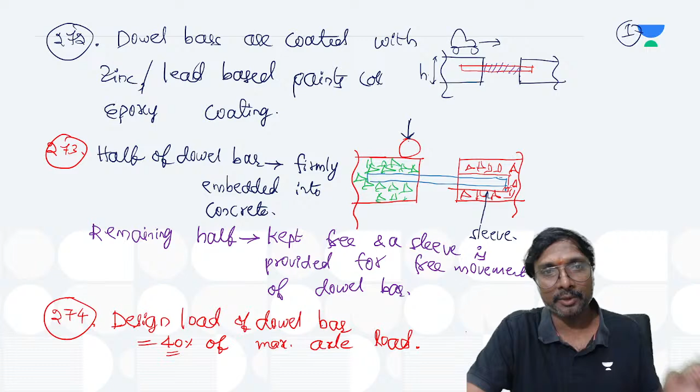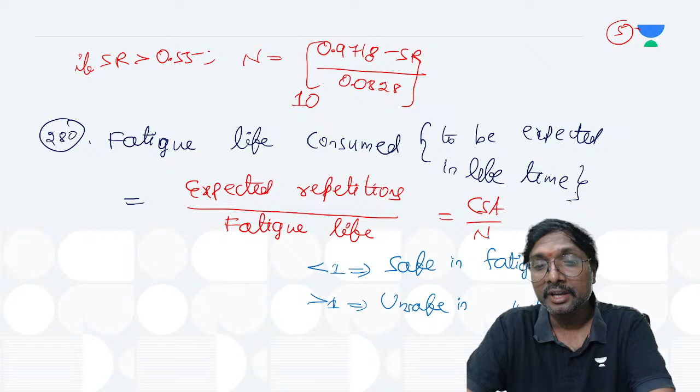So dowel bars and all these things we have seen, mud pumping and fatigue life, right? These are all the things we have done up to fatigue life. So how many points got over? That 280 number of points we have covered, these are completed, you can say.

And if we just observe, all these things we have discussed regarding the rigid pavement. So I will go in a quick manner so that you will have an idea of what we have discussed: standard axle loads, radius of relative stiffness, CSA, and equivalent radius of resisting section, types of stresses.

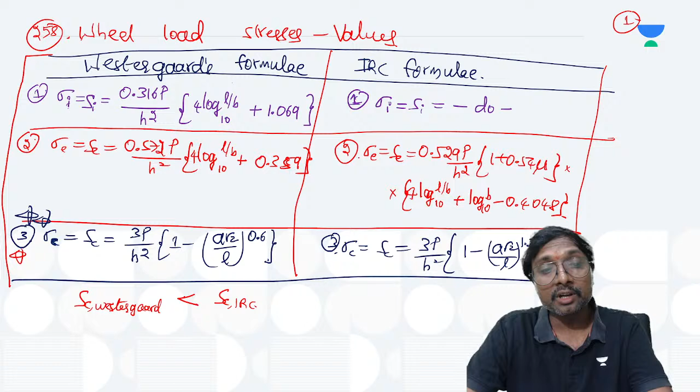Which types of stresses will be having: wheel load stresses, warping stresses and frictional stresses. Nature of wheel load stresses, and amount of wheel load stresses is also done. After that, warping stresses in nature and amount of warping stresses, frictional stresses in nature and amount of frictional stresses, all these are done, yes or no?

Now after that, what happens is the stress combination. Only one type of stress will be acting, or all the types of stresses will be acting on a pavement? All these types of stresses will be acting on a pavement. So this is stress combination, which combinations of stresses we are having.

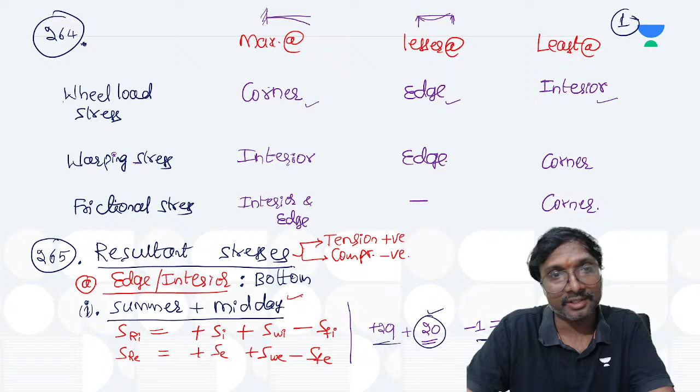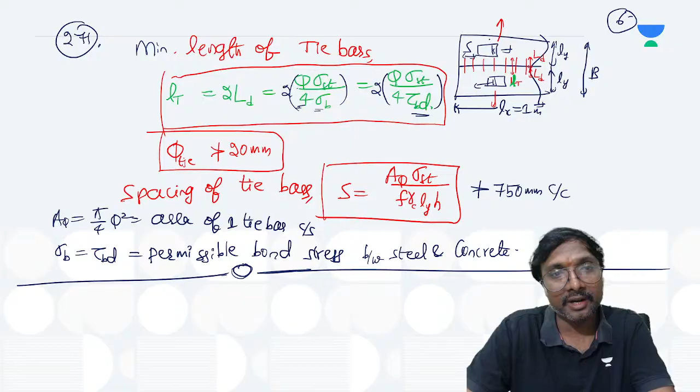Next, what about joints? Expansion joints, and after that contraction joints, their spacing specifications, longitudinal joints, dowel bar, tie bar, and all these things. And after that various other points regarding dowel bar design and design load of the dowel bar, bearing stress or bearing forces.

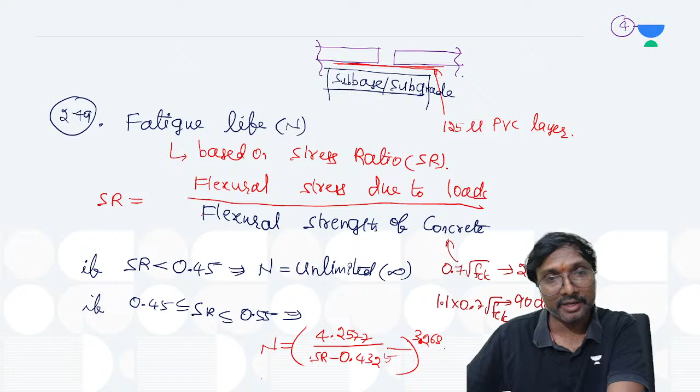And all these things we have discussed, right? So this mud pumping we have discussed, to take care of mud pumping, that 125 micron PVC sheet we have to go for. And fatigue also we have done, so fatigue life, fatigue life consumed - based on this fatigue life consumed, we have to decide whether it is safe or not.

So this is the quick revision for highway, and traffic engineering we'll be going for next. But before we go to traffic engineering, let's see if anything else is left. That is your 280, and you take this as 281, and there is one formula, the Goldbeck formula. Have you heard this formula anytime?

Goldbeck formula for which one? Tell me, thickness of CC pavement, na? It is mainly for thickness of this CC pavement, yes, thickness of CC pavement.

So what is that formula? CC pavement slab. H will be equal to under root of 3W divided by sigma maximum. So what is that sigma maximum? That sigma maximum is your permissible stress. And what is W, if you just observe, W will be your wheel load.

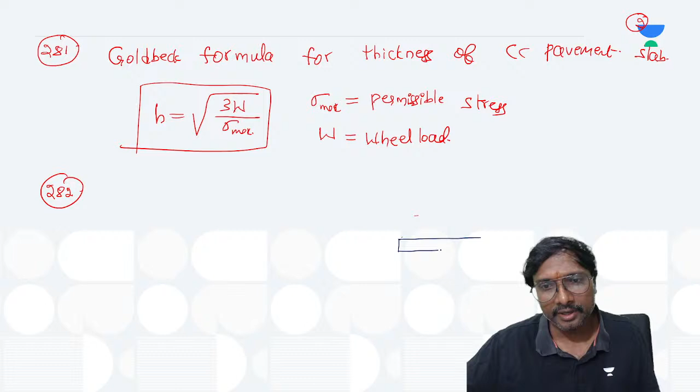First of all, if you just observe, this is your slab if you are considering. So mainly to take care of shrinkage, if that reinforcement is provided, then it is called shrinkage reinforcement. So that is your slab, you can say, if you just observe.

That is your slab, right. Now what is that? These are the reinforcement bars we are providing at the center. So these bars, how do they look like? They will be like this. If you just observe these bars, and if you consider these bars...

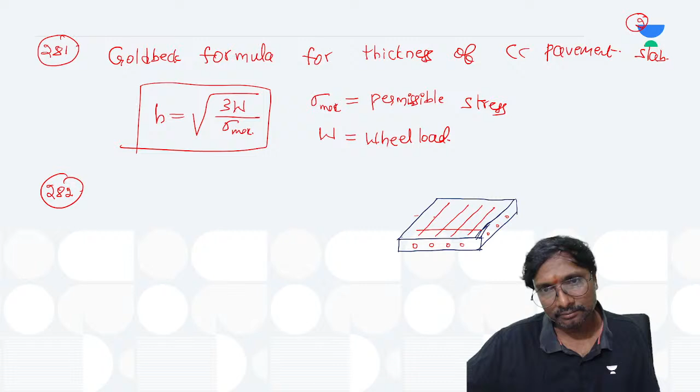So this is your shrinkage reinforcement, right? What is that mainly, that shrinkage reinforcement, tell me? It is to take care of which one? This is shrinkage only, no? So the name itself is telling that shrinkage reinforcement will be provided to take care of this shrinkage only.

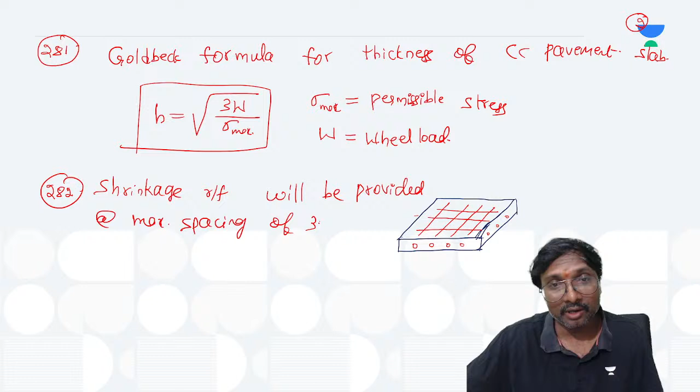Shrinkage reinforcement will be provided at which location, at a maximum spacing? How much maximum spacing do we have to maintain? At a maximum spacing of 300 millimeter center to center, between the reinforcement bars.

So with how much minimum cover do we have to maintain? With a minimum cover of 50 millimeter, right? 50 millimeter from where? From bottom. And the reinforcement will be nearer to top surface, or nearer to bottom surface, if you just observe? It is nearer to this top surface, you can say.

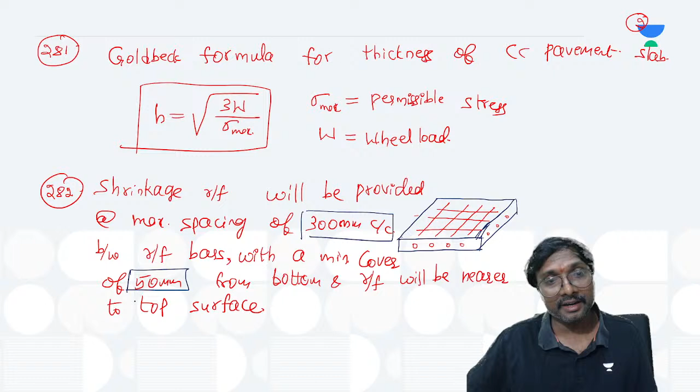Why will it be taken nearer to the top surface? Why can it not be taken nearer to the bottom surface, if you just observe? So this cover is 50 millimeter and nearer to this top surface. This is important, right? Nearer to top surface - what is the reason? Anyone having an idea? What is the reason for this to be provided nearer to the top surface?

Because if you consider, whenever it is top down cracking - what is top down cracking, you can say? Originally it is subjected to, during night time, expansion like this. So whenever the self weight is resisting, what happens? The crack will start here and propagate from top to bottom. Yes or no? This is top down cracking, right?

Next, what is another one you are having? Bottom up cracking, if you just observe. So whenever it is bottom up cracking, the cracking will start at the bottom and it will go in the upward direction.

Now tell me, which crack is dangerous? Top to bottom cracking is dangerous, or bottom to top cracking is dangerous? Tell me. If the crack is at the bottom, water will not go into it, so there is no problem. But if it is a top crack, there is a possibility that water will enter and everything will enter onto this - it is dangerous, right? So it is better we prevent this top down cracking.

So it is better you provide - how can you prevent this cracking? When you are providing the reinforcement nearer to the top surface or nearer to the bottom surface? When you provide this reinforcement nearer to the top surface only, it is possible. Understood now? Why it is nearer to the top surface? Clear, everyone, all of you? Why should the reinforcement be provided near the top surface? Is it clear or not? Is it not? Hello? Somebody?

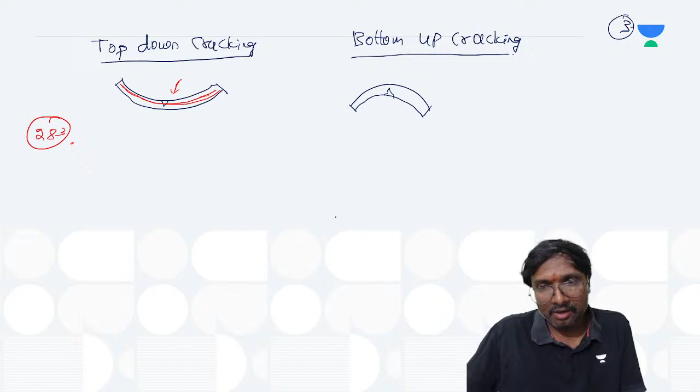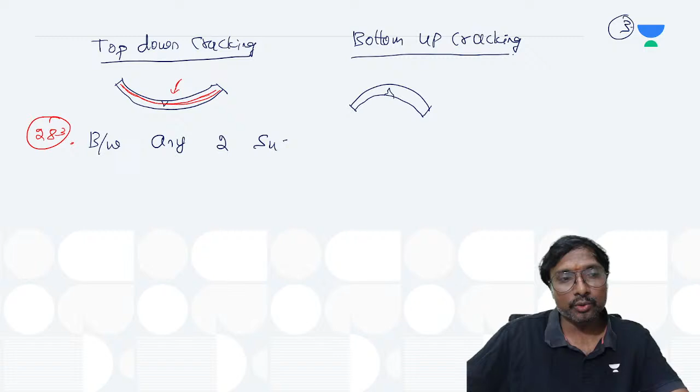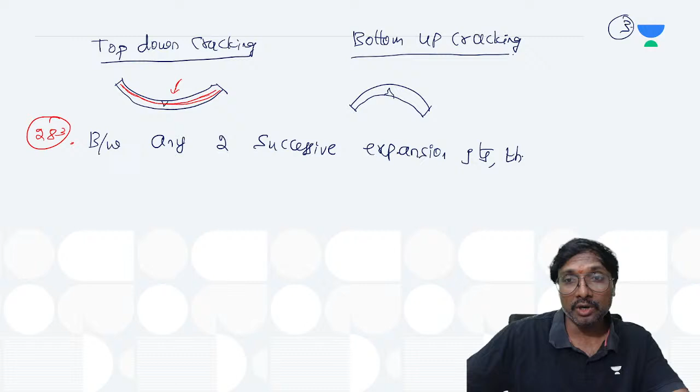No. So what do we need to do? Between any two - which one? Between any two successive, what is it? Between any two successive - successive means nearby, okay? Between any two successive expansion joints, there must be what? Minimum how many number of these contraction joints do we have to provide? There must be what, right? Tell me - there must be at least two number of contraction joints.

There must be which one? At least how many number of contraction joints should we have? Two number of these contraction joints. Okay.

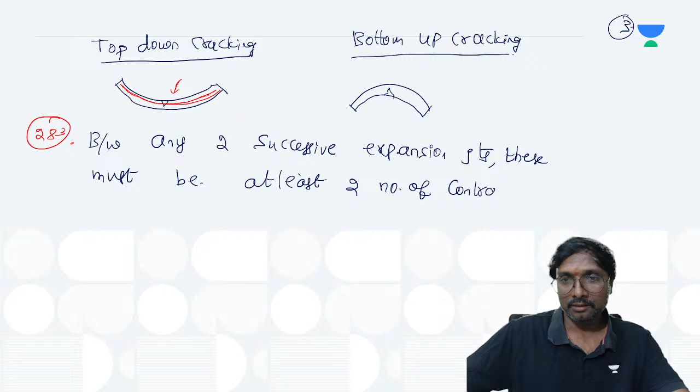Minimum two number of contraction joints we should have, right? So here two number of contraction joints, that too with equal spacing or with unequal spacing is better, tell me. With equal spacing is only recommended, you can say.

So just for an example, whenever that LE, what is that LE, you can say length of this expansion joint. LE is equal to 50 meter, and the length of this contraction joint, LX is the symbol we are giving, LX is equal to 10 meter, right? Do you have any problem in providing this?

Tell me, here how many contraction joints will come? 10 meter means, what is it going to say? This is your 10 meter, this is your 10 meter, this is your 10 meter. How many will come? 1, 2, 3, 4. And this is your 10 meter, you can say.

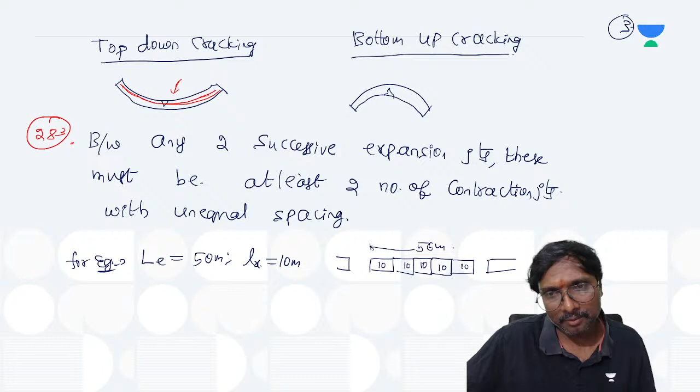And now if you are providing this expansion joint, that is your 50 meter, right? Do you have any problem? No problem, okay, it is acceptable. Why? Because equal spacing is only maintained.

Yes or no? Now second one, LE will be equal to 25 meter, and LX is equal to 10 meter, and what is another one possible? 5 meter. Why? Because if you just observe, one we have to provide at 10 meter, one we have to provide at another 10 meter, and the remaining at 5 meter only.

Now tell me, is it uniform spacing maintained or not? It is not uniform spacing maintained, because to make this 25, 10 plus 10 plus 5 only must be there. So this second combination, is it allowed or not allowed? This second combination is not at all allowed. Is it clear?

So this is about rigid pavements, right? Now shall we enter into this traffic engineering? This is 283 point. So next chapter, shall we enter into this traffic engineering?

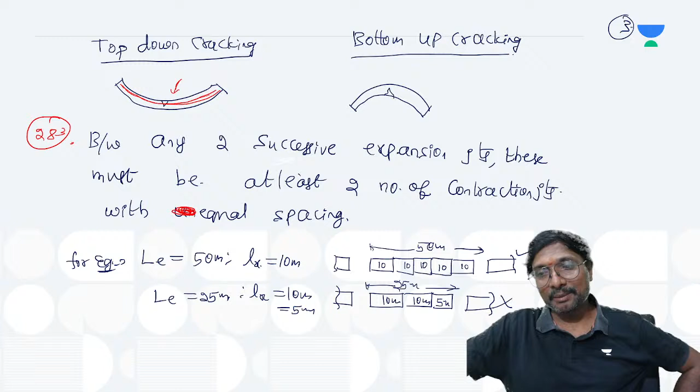Oh sorry, equal, with the equal spacing, right? It should not be unequal, it should be equal. Yes. Okay, you just strike off this, right? I thought, okay it is equal, with an equal spacing. Okay, instead of writing 'an' I have written 'un', by mistake, okay. So equal spacing maintaining is better, or unequal spacing maintaining is better? Tell me, equal spacing maintaining is only better, yes or no?

So what is that? Traffic engineering. We'll be discussing about this traffic engineering. What is that chapter name, topic name we have given? Speed and volume studies. So that is your 283 point, and this is your 284 point, you can say.

So what is this 284 point? If you just observe, that is speed. Whenever you are considering this speed, what is the unit of this speed? You can say that is kilometers per hour, or you can also use meter per second. Now tell me, there are different types of speeds. What are the different types of speeds? You can say that is journey speed, JS.

So what is the journey speed JS? You can say, if you just observe, it is total journey distance D divided by which one? Journey speed means we have to consider journey time, or only running time, or only stopping time? It is journey time we have to consider. Now if you just observe, it is which time we have to consider? That is journey time only we have to consider.

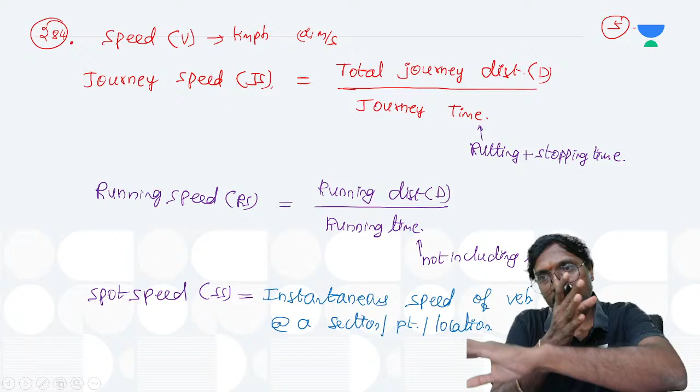Instantaneous speed of vehicle is nothing but instantaneous speed of vehicle at a section or point or location. Means at a particular section, point or location on the road, at this particular point whenever the vehicle comes to this location, what speed it is maintaining, right? That is your spot speed, you can say. This is called spot speed, right.

So these are the three different types of speeds, right? These are noted, everyone. So I'll move forward. Once these are noted, I'll move forward.

Now what is this point number 285, na? So 285, what do we have here? If you just observe, which one is higher? That spot speed is higher than the running speed, and it is higher than this journey speed, na? Is that so? Isn't it? That is a relation we generally have. And which one is used for geometric design?

Spot speed, SS, is nothing but your spot speed, na? And spot speed is most important with respect to what? You can say it is most important with respect to the geometric design of the road, na? So whenever you are going for geometric design of roads, right, which speed do we use? That spot speed only we use, na? We are not using the running speed and we are not using the journey speed. Is it right?

Now, what is it? Next speed will be time mean speed. If you just consider time mean speed, right? What is the time mean speed? That is your TMS. We are representing with which symbol? That is your VT symbol, you can say, right?

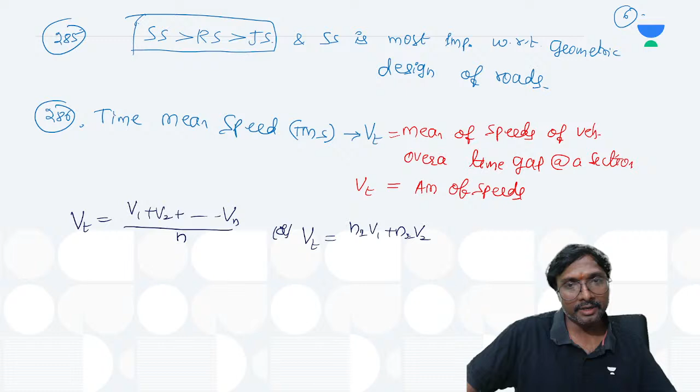N. So if V1 speed is repeated one time, V2 speed is repeated two times, so on Vn speed is also repeated this one time only, or what is that? VT you can say in another manner, N1V1 plus N2V2 plus so on NnVn divided by which one?

N1 plus this, N2 plus this, so on Nn, you can say, is that it? So this is what we are having, right? So it means when V1 speed is repeated for n1 number of times, V2 speed is repeated for n2 number of times, so on Vn speed is also repeated for nn number of times. That is why you will be getting time mean speed. Time mean speed is the arithmetic mean of all the spot speeds given.

The next one is space mean speed.

Space mean speed, that is your SMS, right? What is the symbol we are giving? That is your Vs, a symbol we are giving for this now. So Vs is a symbol we are giving for this space mean speed. Then what is it, tell me.

It is a mean of speeds of what? Mean of speeds of all these vehicles measured over which one, tell me? Time mean speed is time gap, na. So space mean speed is nothing but your space gap, measured over a distance, at a particular time.

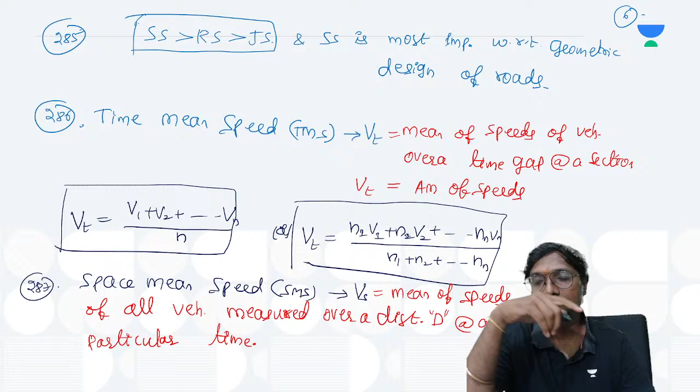Yes, yes, tell me, Mohit, what is? Tell me, Mohit. Done? This one is done. Shall we move to the next? 288 point.

Okay, sorry, it is not 288. So what is that Vs? Okay, okay, I'll wait one second.

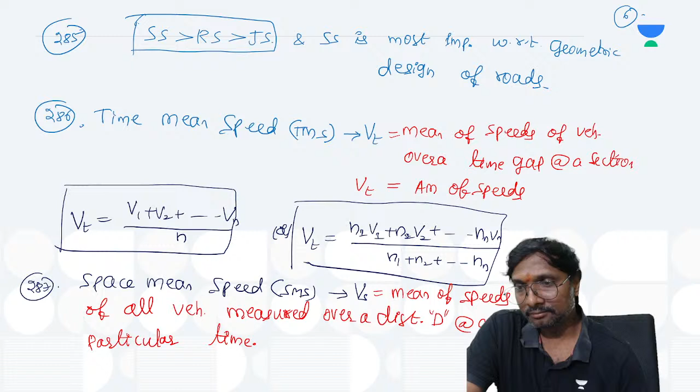Sir, my attempt was 2026, this 2025 will be in third year. I have completed 5 subjects now. Sir, I will be revising one subject along with the current subject. Yes, yes, it is absolutely correct, right? You revise along with the current subject. Now you try to revise which one? These are 2 subjects, right? How many subjects are you doing live now? 1 or 2 subjects you try to revise from previous subjects. Okay, that is sufficient enough, right? Because you are having sufficient enough. Already 5 subjects are over, it means it is good. Along with the live subjects, you are revising 1 or 2 subjects, that is well and good. Okay, yes, that is sufficient enough.

Done, so what is the Vs? You can say Vs is nothing but the harmonic mean of these speeds given. It is nothing but the harmonic mean of these speeds, right?

Yes, GATE and ESE PYQs you have to solve definitely. If you are preparing for GATE examination or if you are preparing for the ESE examination, GATE PYQs are very important and ESE PYQs are also very important.

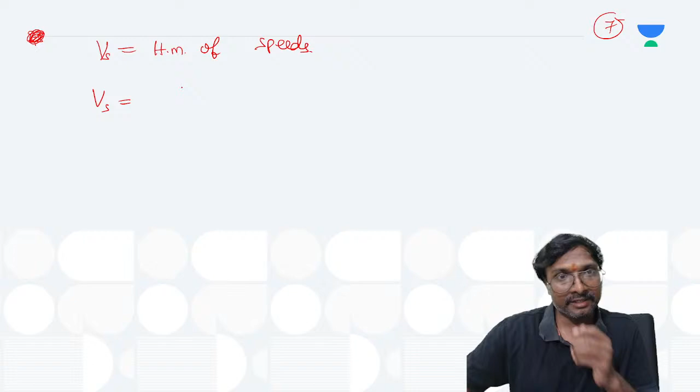Yes, absolutely, okay. So now what is the Vs equal to? That is 1 divided by, what is it? That is 1 by n into 1 by V1 plus this 1 by V2.

Yeah, you can ask me in the group or you can ask me wherever you want, whenever you want, directly. Yes, yes, you can ask. Plus this, so on 1 by Vn. Yes, yes, you just ask your doubt, no problem. You just ask your doubt.

Okay, have you done highway from me only or some other faculty? There you check it, Mohit, right? In the plus course which I have taken, you just check it, right? You will be getting those contact details, okay? Here we cannot give, right? Okay, okay.

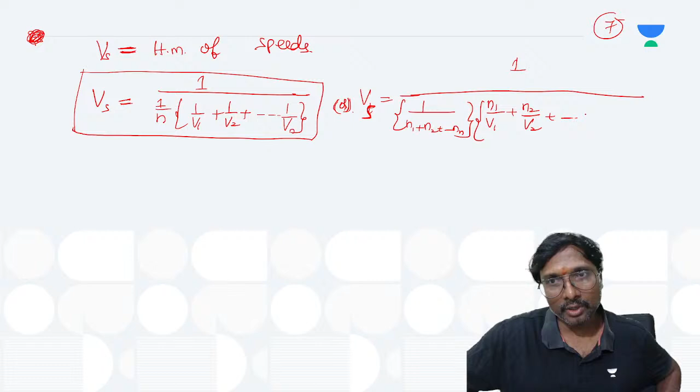So what is it? This is your Vs, right? If it is a repetition, what happens, tell me? That Vs, it is not Vt, it is Vs. Vs is nothing but 1 divided by 1 by n1 plus n2 plus so on nn, into n1 by v1 plus n2 by v2 plus so on nn divided by vn.

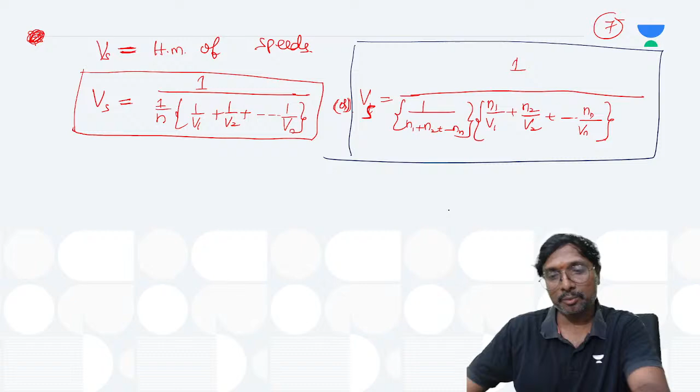Because whenever your vehicle is moving, the movement within a time or within a space is more important. Geometric design we are mentioning, right? Geometry means it is a space related property, not a time related property. If you just observe, it is a space related property only. Whenever it is a space related property, we have to consider the speed averaged over space rather than averaged over time at a particular section, so as to match our requirements. That is why by default we consider space mean speed in traffic design, geometry design, and traffic flow conditions.

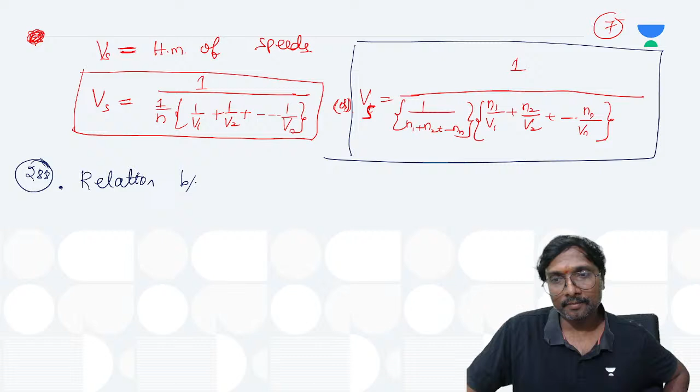Now what is the relation between this time mean speed and this space mean speed? Relation between TMS and SMS, right? SMS means space mean speed, TMS means time mean speed. What is the relation? Vt will be equal to Vs plus sigma square divided by Vs.

So Vs we know, what is Vt? Vt is nothing but your time mean speed, Vs is nothing but your space mean speed. And sigma, if you just observe, is nothing but the standard deviation of these speeds. So that is your 288th point. And Vs is already known as space mean speed, Vt is already known as time mean speed.

Now if you just consider it, there is a term called coefficient of variation. What is the coefficient of variation? CV equal to sigma, standard deviation, divided by the arithmetic mean, divided by the mean speed or arithmetic mean speed.

Is it visible now or not? One second. Is it behind my head or visible? Let me try to write it a little more to the left side, one second. So that is your standard deviation divided by the mean speed.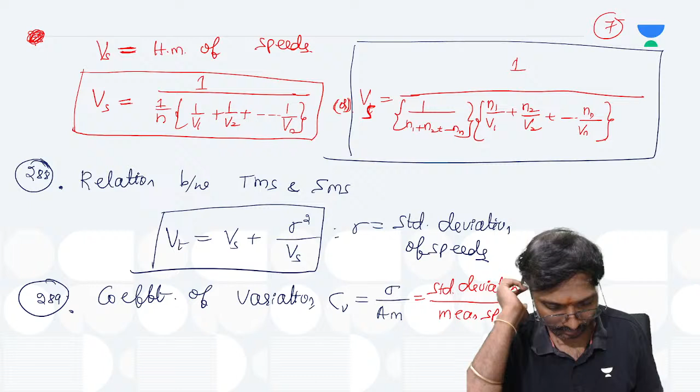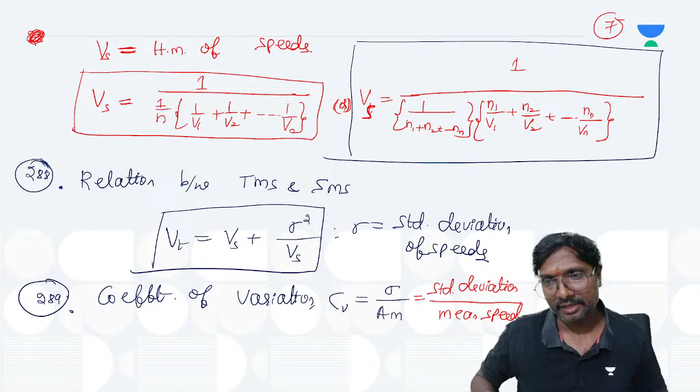So if along with the ongoing subject I target the revision of old subjects, will the subject whose revision is done first come again later? Yes, because there are many subjects, you have to do the revision now, quickly. Whenever you are doing the revision for the first time, you will be doing it slowly, but when you do the revision of the same subject the next time, it will not take full time since the subject is already completed. Suppose the present ongoing subject is taking 50 hours; during those 50 hours, you don't revise the previous one fully, you revise it within just 20 hours, or 10 hours, or even 5 hours. Once that is over, you complete one more subject. Once that is over, you complete another, and once all subjects are covered, you repeat those subjects. If you plan like that, it will be good, okay?